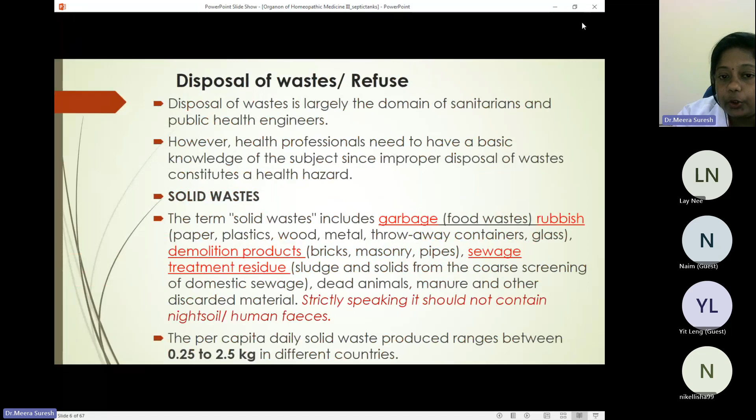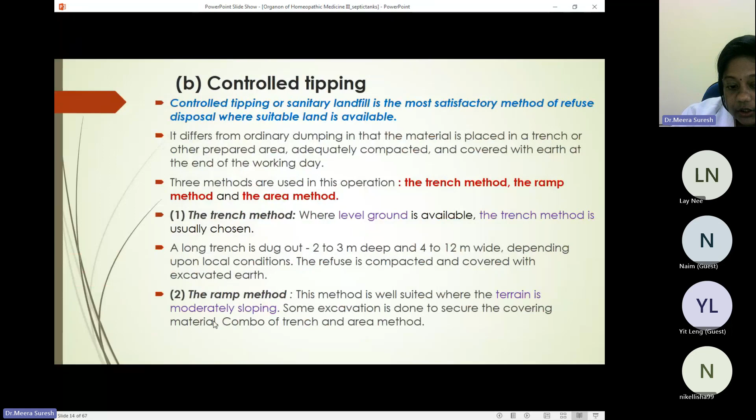So last class we were doing the conservancy, or how to do the waste disposal. So we were doing the disposal of the refuse, the different methods to be followed: dumping, which is not at all a sanitary method, and then the controlled tipping, in which we make it layer by layer. And then we saw, according to the area that is available, there could be a trench method, a ramp method, and also the area method.

But the problem with the area method is there won't be any excavated earth to cover over that dumped waste. So we have to bring the earth or the sand to cover it from somewhere else. So that is the only negative with the area method.

And the principle, be it area method, ramp or trench, or even the dumping, the principle is the same, because when we put it together or dump together and layer it and also cover it, after a few days, because of the thermal changes or the action of the bacteria, the temperature increases, and that temperature will be killing all the organisms, all the bacteria. And after a few days, like 2 to 3 weeks, it will be cooling down, and then it will be converted into an organic matter.

And we saw incineration, especially when there is no area. In Singapore, the main method is incineration. They take the waste material to an island where there is no inhabitant, and then they incinerate over there. The best method to dispose the hospital refuse or the hospital waste will be doing the incineration.

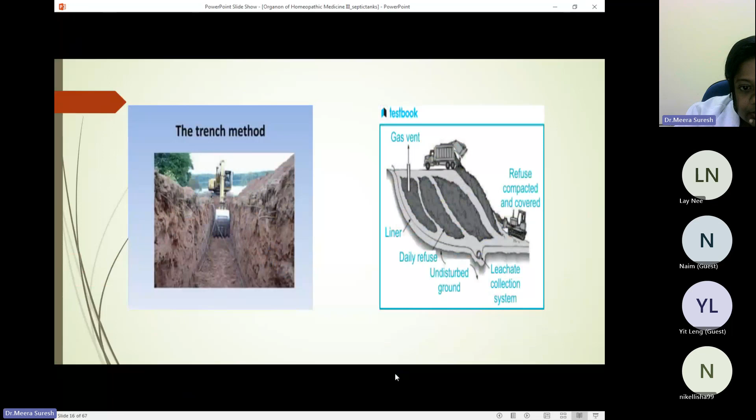So, oh, did I take this incineration? I'm not sure. Did I take it, or I stopped with incineration? Huh? I think I did only this much, isn't it? I have to do incineration, I guess.

Yes, okay. So incineration, it is burning in a high scale manner. So refuse can be disposed of hygienically by burning or incineration. It is the method of choice where suitable land is not available, when we don't have enough area. Like in Singapore, you know how your neighboring country is so dense, and there is no area available. So in that case, when there is no area available to dump it or do the controlled tipping,

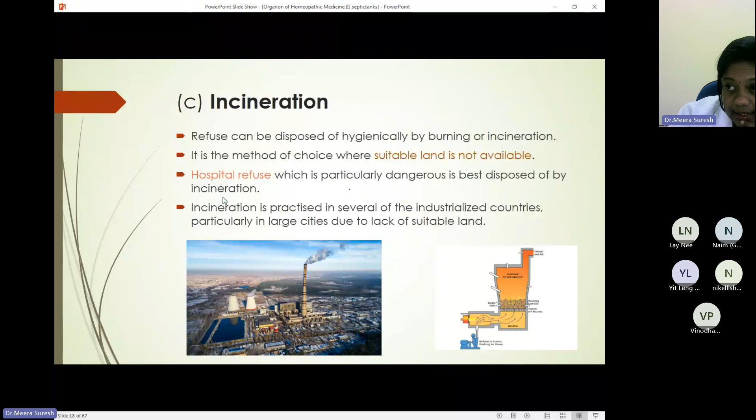the best method is incineration. Hospital refuse, which is particularly dangerous, is best disposed of by incineration, because in the hospital there may be the clothes, which will be having the blood or the pus, or any discharge from the patient, and also the used syringes. So they are easily transmitting any kind of disease. So they're particularly very dangerous. So it is better to get it disposed of by incineration. Incineration is practiced in several of the industrialized countries, particularly in large cities, due to lack of suitable land.

So I have kept a lot of videos for you to watch. I think we'll watch just one from this. The other videos, maybe you can watch it later. So we are seeing the YouTube page now. Are you all? Yeah, seeing the screen, yes.

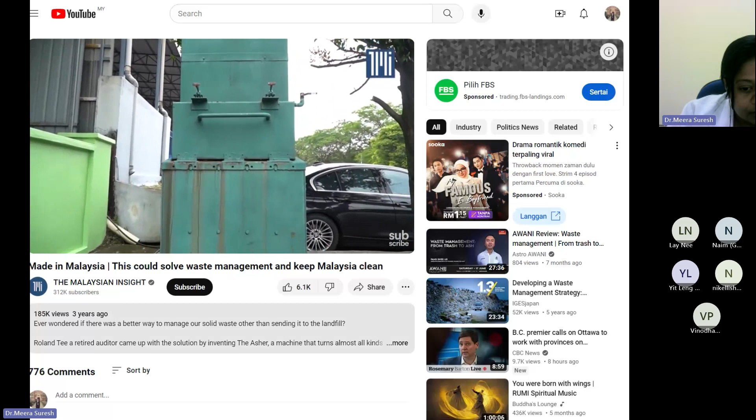The waste that we have here is just a mixture of all types of waste. You don't have to do a segregation when it comes to the Asher. Even you look at this one, it's just a power bank battery. We can just drop it in. We can just put it into the Asher. Used plastics, cans, boxes, your general municipal waste from your household. Everyday waste, easily treated. You don't have to do any sorting. You put in a power bank, you can go. You put in a spray can canister, you can just go. All right. So all this can go into the Asher easily without sorting, without any segregations.

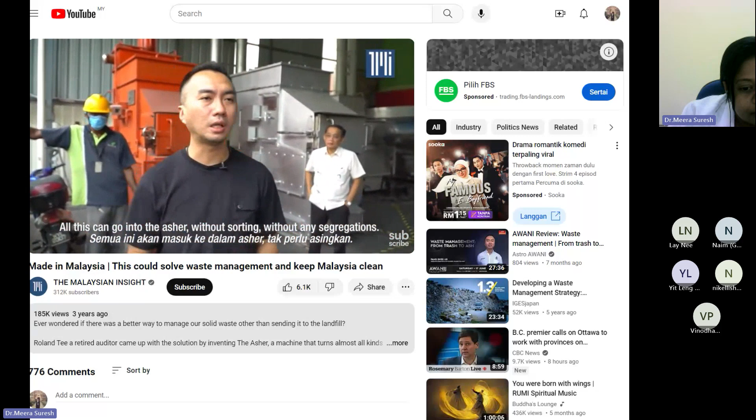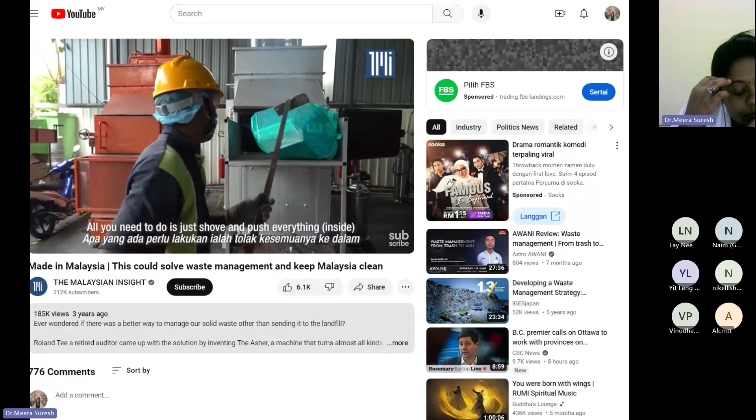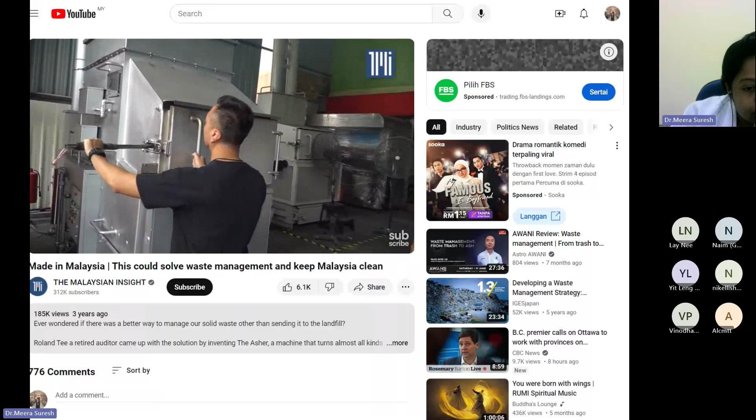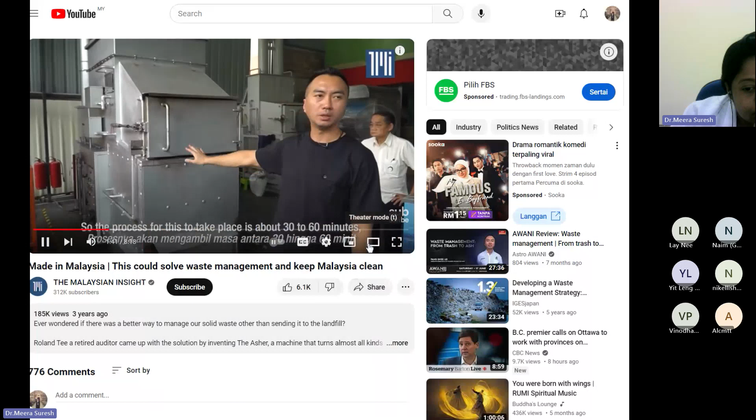And to operate the Asher is very easy. Ragu? So all you need to do is just shove everything in, just push everything. The Asher now is operating at about 400 to 500 degrees C. And as you continue to use it, it will build up to 700. Next one goes up to 1100 degrees C maximum. So once the chamber door is closed, it will be a closed loop system. There's no other emissions coming out of it. So the process for this to take place is about 30 to 60 minutes. Everything will be disintegrated into ash.

What happens in the chamber is baking and drying at ultra high temperature, right? So there's no fire, there's no combustion in this system. We are not burning. It's just heating and drying, right? So when you do not burn, there's a very different chemical reaction as compared to incinerators or WTE. So what we are availing here is a very clean, cost-efficient, and practical solution to treat waste, to dispose waste without fuel, without diesel, without gas, without any petrol. It's going to be self-generated, the heat, and will self-contain and continuously be treating the waste without external fuel energy. Just for demonstration's sake, this is untreated smoke, right? This is very bad.

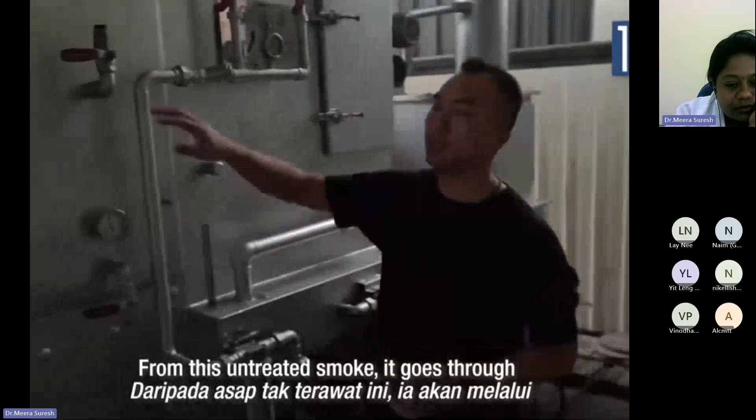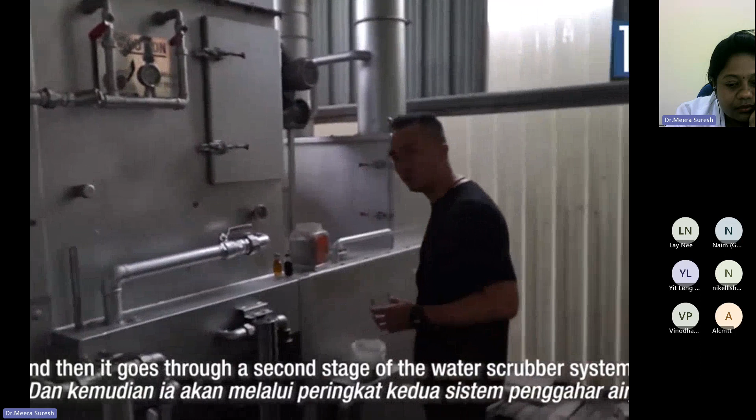So from this untreated smoke, it goes through the proprietary water scrubber system, carbon filtration system, and then it goes through a second stage of the water scrubber system and the filtration system. So after the two filtration systems, we release full compliance vapor.

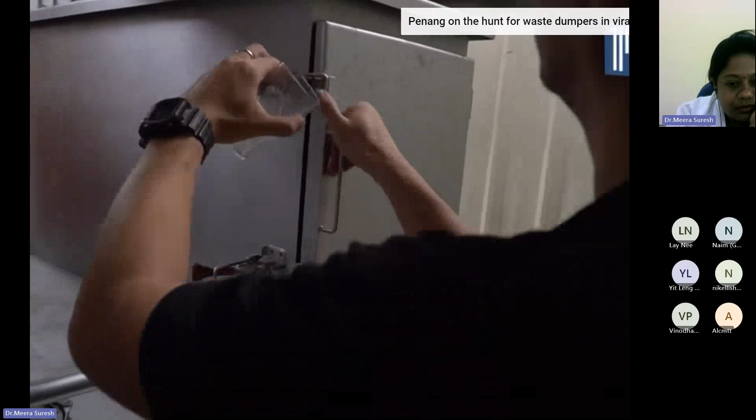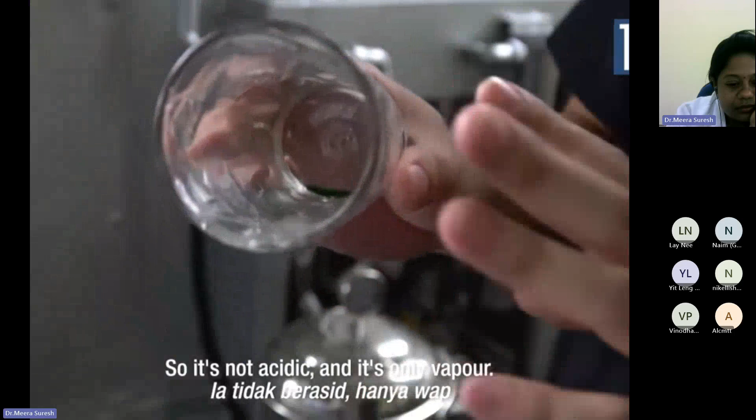So we release only vapor after all the filtration system, and the vapor is in the form of mild alkaline, a pH of 8.5. So it's not acidic and it's only vapor. The fume that comes out is 100% vapor. It's not smoke. For our 2-ton solar, it's 70% vapor, 30% smoke. And our emissions are in full compliance with the US EPA standards. Our suppression system is easily more than 99% effective against the allowable limits.

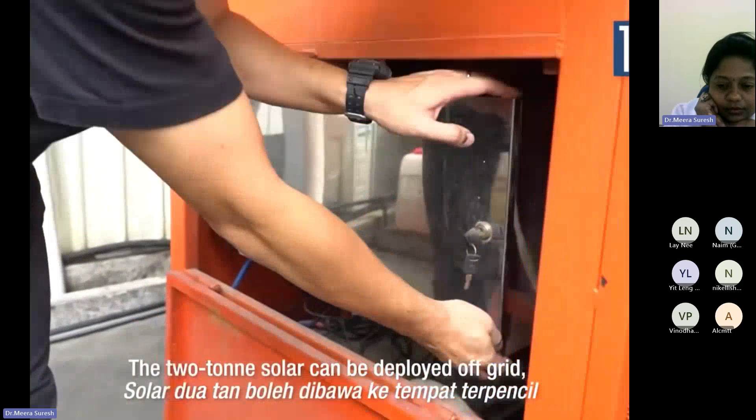And the electricity that is used by the electric unit is not for the heat treatment process. The electricity here is for the aeration system and for the water scrubber system. And the power that we consume from the Azure is, on average, not more than 4 kilowatts per hour, which is very much the same as your 1.5 horsepower aircon at home.

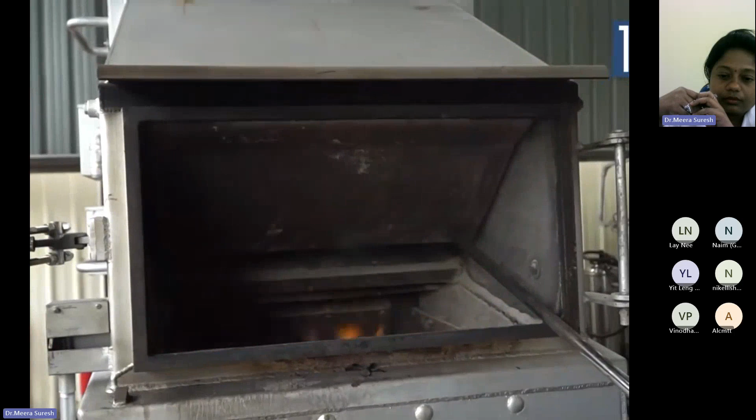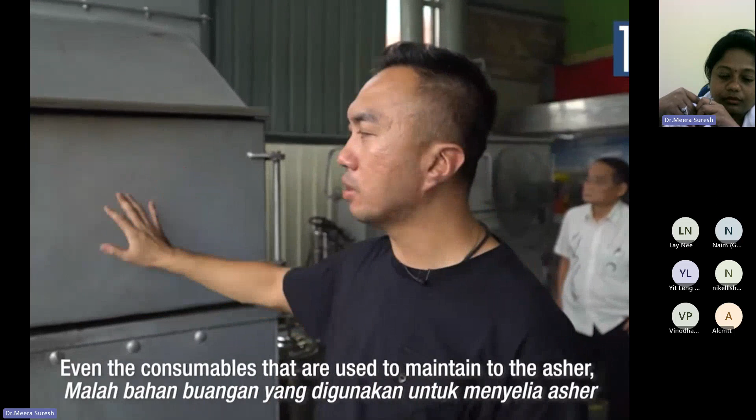What we are doing now is currently relocation of waste from one location to another location, and finally to the landfill or the incinerator. In this case, everything that comes here ends here, stops here. From the asher itself, there's no secondary discharge. There's no secondary contamination. Everything stops here. Even the consumables that are used to maintain the asher will be self-treated in the system. It will not be sent somewhere else.

And the byproduct of the asher, which is the ash down here, can be used as fertilizer, or you can use it to make sand bricks. This thing is green and environmentally friendly. Even the surrounding of the working area of this place is clean.

We have tested the environmental air quality within this working area using a system. The air quality parameters, which include CO, CO2, PM 2.5, NOx and SOx, are all in the green zone. It means that this is a place that is suitable and safe for the workers to work. There's no smell, very minimal smell. There's no wastewater around here.

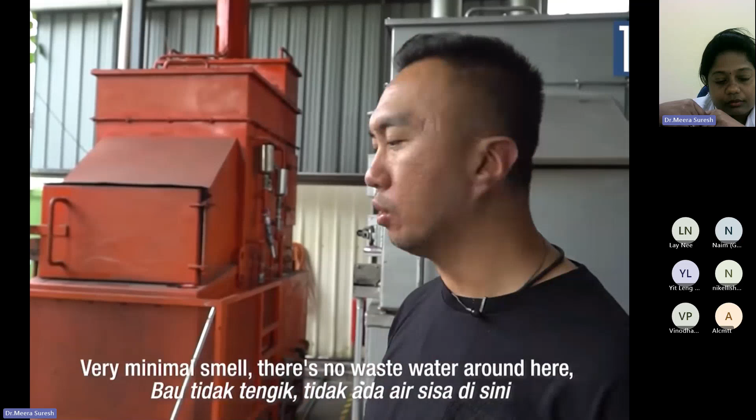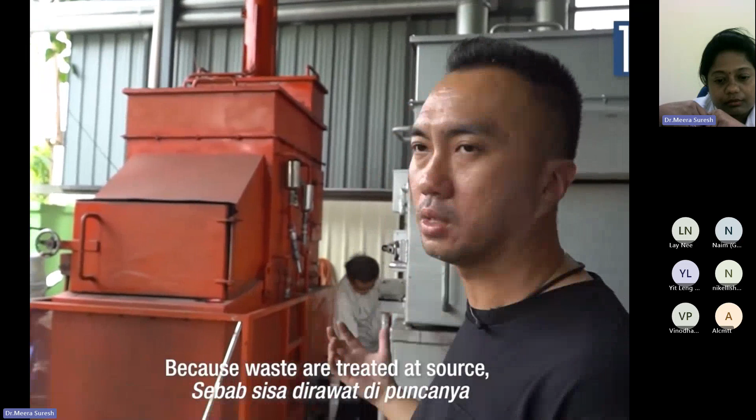There's no bacteria, rodents, flies or maggots around here, because waste is treated at source, as early as source. Whatever comes, we just put it into the asher and treat it. Imagine this being placed at condominiums, shopping malls, airports, low-cost apartments, or taman perumahan. Waste is treated at source rather than being accumulated and transferred from one location to another. In the KL scenario, it goes from the household community to the transfer station, and from the transfer station to the landfill.

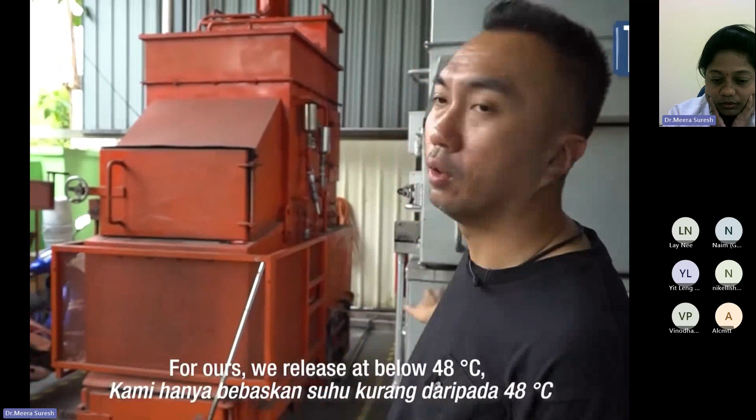In terms of capacity, this is the 2.5-ton electric smokeless. So on a daily basis, we are treating between 2.5 tons to 3 tons. A large incinerator ranges between 500 tons to 1,000 tons. In terms of emission temperature, an incinerator will release its emission at between 150 degrees C to 180 degrees C. Ours releases at below 48 degrees C. So in terms of temperature, it doesn't impact the environment.

In terms of pollutants, like I mentioned earlier, our suppression system is up to 99% efficiency. For instance, the most pressing matters will be dioxin and furan. The allowable limit for dioxin and furan based on the US EPA standards is 0.1 ng per meter cube. This asher releases 0.0014, which is about 99% lower than the allowable limit.

In terms of CO, carbon monoxide, the allowable limit based on the US EPA standards is 50 mg per meter cube. Our system releases 0.2 mg per meter cube. That's about 95% lower than the allowable limit. So we have tested; this is not a concept, this is not a trial. We are in 13 countries, and we have supplied more than 60 units.

Yeah, so coming back, I hope you enjoyed the video. How was it? Yeah, good info, because I never think of that.

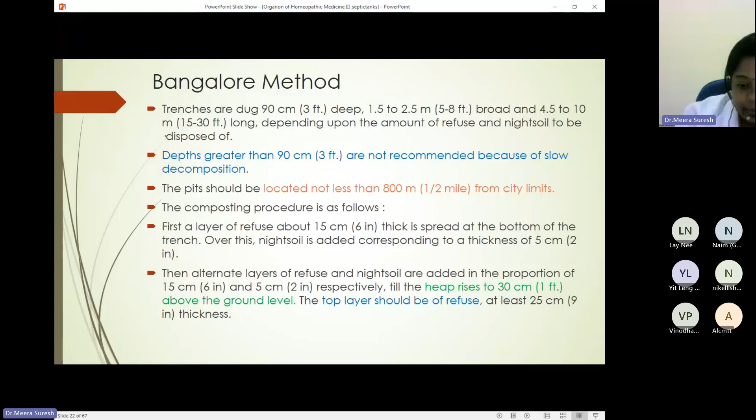Then alternate the layers. So one layer will be refuse, then another layer of night soil. They keep it layer by layer till the heap rises to 30 centimeter or 1 feet above the ground level. And the top layer should always be refuse, not the night soil. So the first underneath layer is refuse, and the topmost layer should also be refuse. And the refuse has a thicker layer compared to the night soil. So it is kept in an alternate way, and when it reaches 30 centimeter above the ground level, then close it off.

It is covered with the excavated earth. If properly laid, a man's leg will not sink when walking over the compost mass. And the same principle is happening. Within 7 days, the bacterial action takes place, which produces heat over 60 degrees Celsius, and that will be converted into the compost mass. This heat will persist for 2 to 3 weeks. It then decomposes the refuse and the night soil, and all the pathogenic organisms will be destroyed, completely converting that waste, the refuse and the night soil, into a high manure compost.

At the end of 4 to 6 months, decomposition is complete, and the resulting manure will be an odorless, innocuous material of high manurial value ready for application to the land. However, the Environmental Hygiene Committee did not recommend composting by municipalities with a population of over 100,000. Bigger municipalities should install underground sewers to transport human excreta. So this committee in 1949 itself told it is possible for municipalities with less than 100,000 population, and bigger populations should have underground sewers to dispose of human excreta.

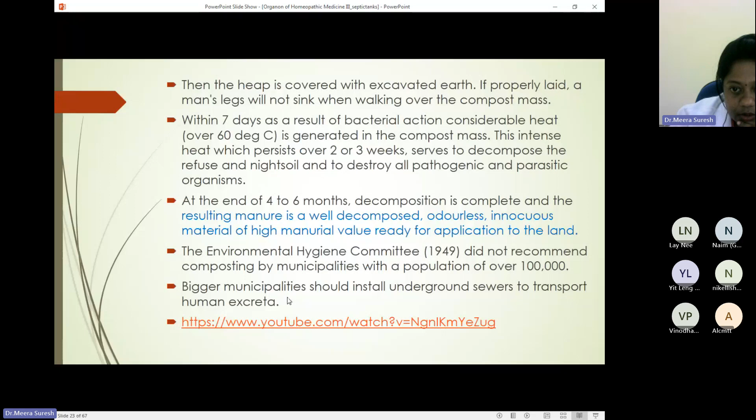Okay, this is a video that is showing the process of composting, the methods, the Bangalore method, and also the mechanical. Maybe we watch mechanical. Because in this anaerobic method, the Bangalore method, when the area is available, we are doing it manually. But in mechanical, we take this refuse and the night soil, and it is treated to produce manure in some factories.

So ASHO was not exactly composting, or maybe it can be considered composting, but he didn't say anything about the night soil. He just told anything can go into it, even the power bank. I'm not sure, but in the case of mechanical composting, the compost is literally manufactured on a large scale by processing raw materials and turning out a finished product. The refuse is first cleared of salvageable materials such as rags, bones, metal, glass, and items which are likely to interfere with the grinding operation.

So definitely not according to the video that we saw. So they first remove all the things which are going to interfere with the grinding, and then they're going to grind it or pulverize to reduce the size of the article to less than 2 inches. The pulverized refuse is then mixed with sewage. The sewage means the sludge that is coming from the public sewerage, and then it is incubated in a rotating machine. It is put in a rotating machine and then incubated.

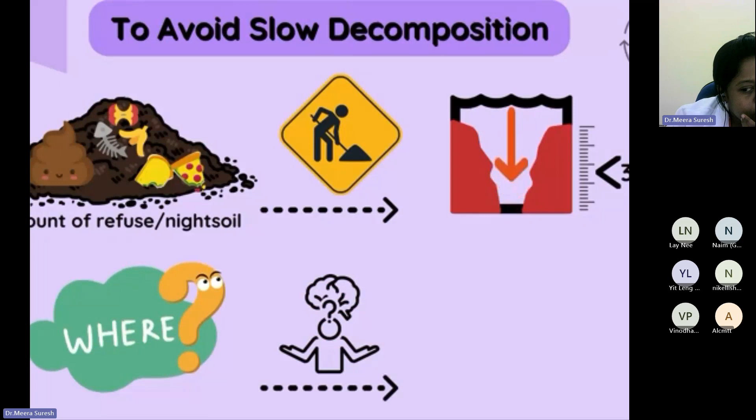To begin with, this is an anaerobic procedure developed by the ICAR, or the Indian Council of Agricultural Research at the Indian Institute of Science, situated in Bangalore, and hence the name. So, what exactly is done in Bangalore method? In the Bangalore method, we first dig pits or trenches depending upon the amount of refuse and night soil to be disposed of. To avoid slow decomposition, avoid trenches having a depth of greater than 3 feet. You might be wondering, can these pits be dug anywhere? Well, this technique specifies that the trenches need to be located at least 800 meters away from the city limits.

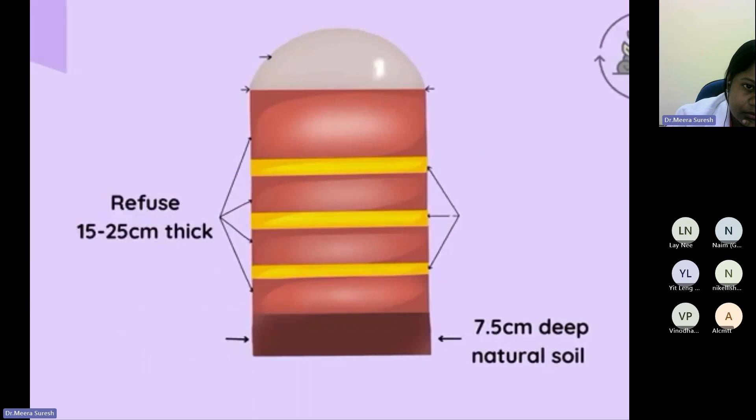So, what next after digging the pits? As you can see here, first, a layer of refuse is spread at the bottom, over which a layer of night soil is added. Night soil is a term used to refer to human excrement and other bodily waste that is collected from households and used as a fertilizer for crops. The term has its roots in a time where human waste was collected at night and transported to fields for use as fertilizer during the day. Following this, alternate layers of refuse and night soil are added till the heap rises 1 foot above the ground level. Always remember, the top layer of this heap should be of refuse, which is at least 9 inches in thickness. This heap is then covered with excavated earth and then compacted to prevent fly breeding, entry of rainwater into the pit, and for conservation of the released energy.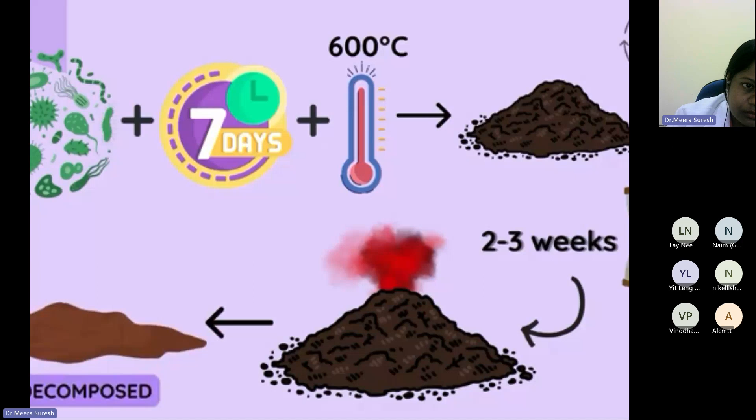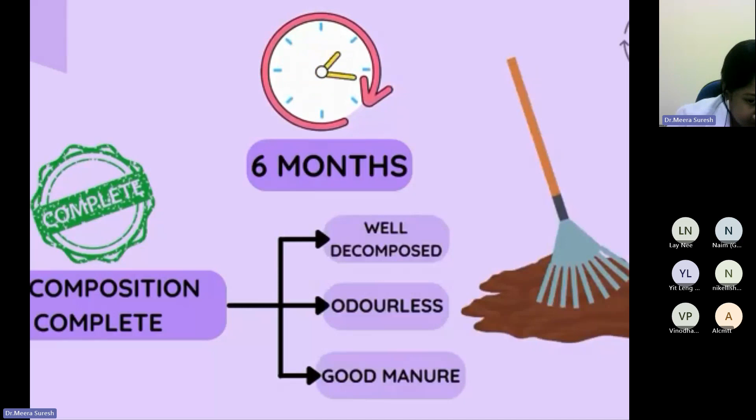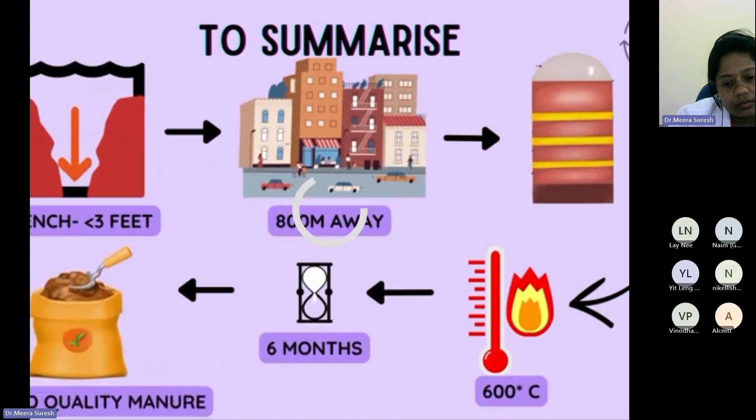Due to the bacterial action, within 7 days, considerable heat of over 600 degrees Celsius is generated in the compost mass. This intense heat will persist for over 2 to 3 weeks, thus leading to the decomposition of the waste. This is the reason why this procedure, alongside being known as the Bangalore method, is also known as a hot fermentation process. By the end of 6 months, the decomposition is complete, and the resulting material is a well-decomposed, odorless material with good manurial value. To summarize, this procedure is carried out by digging trenches at least 800 meters away from the city bounds, and alternate layers of refuse and night soil are filled in, with the top layer always being the refuse. The heat of over 600 degrees gets generated within a week, and by the end of 6 months, we have our decomposed material ready, which can also be used as good quality manure. This was all for this video. Hope you have a better understanding of

Sorry. When I was sharing, I did the Bangalore method. Then is the mechanical thing. I think you may watch it later. We'll go to the next one because there is another video also which I want you to see. So mechanical composting, I made a mistake. Okay, I shared this one. Actually, it should have been this one. So you can watch it later.

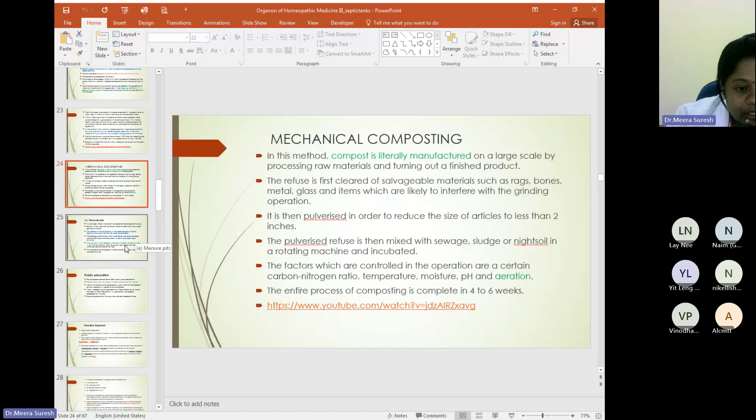We go to the last method of refuse disposal, that is manure pits.

I think I have not shared. Are you seeing the PPT now?

Okay, manure pits. So the last method will be the manure pits. Manure pits are used in a rural area, in a single individual house, where they don't have any other methods of composting. It is composting, but on a small scale. In front of each house, we can do it. So they are going to make a pit, not in a very wide, large area.

In rural areas, there is no system for collection and disposal of refuse. It is thrown around the house indiscriminately, resulting in gross soil pollution. So the problem of refuse disposal in rural areas can be solved by digging manure pits by the individual householders. The garbage, cattle dung, straw and leaves should be dumped into the manure pits and covered with earth after each day's dumping.

So in each individual house in a rural area where they have space, they can go for this method. After putting in every day the refuse that has been produced that day, cover it with some earth, then reuse it the next day. Two such pits will be needed. When one is closed, the other should be in use. Once one pit is getting filled up, use the second one.

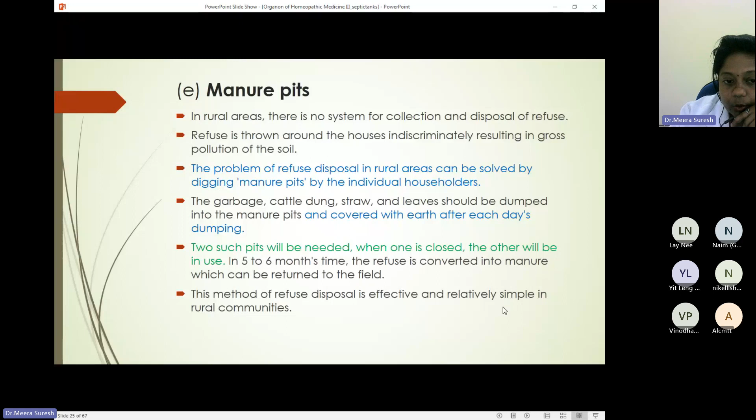Refuse disposal cannot be solved without public education, because people have very little interest in cleanliness outside their homes. Once the waste bin or dustbin has been dumped in the common area, we are not bothered about what is happening outside. So public education is very much required. Many municipalities and corporations usually go for the cheapest solution, especially in regard to refuse disposal.

In one of the earlier PowerPoints on the water system, there was a sentence, I don't know whether you remember, that even in Malaysia, the government was ready to give more money for the supply of safe water, and gave a very small amount for the sewerage system. So the public sewerage system didn't come up to the mark, because the amount they were ready to spend on it was very little. The main priority was supply of safe water.

That was not just Malaysia; it is a generalized thing that people give more importance to water supply, because it is one of the most indispensable things we need for the existence of life. When a community has to set priorities between safe water and waste disposal, both are equally important. But if resources are very limited and we are asked to prioritize, a little more priority will go to safe and wholesome water.

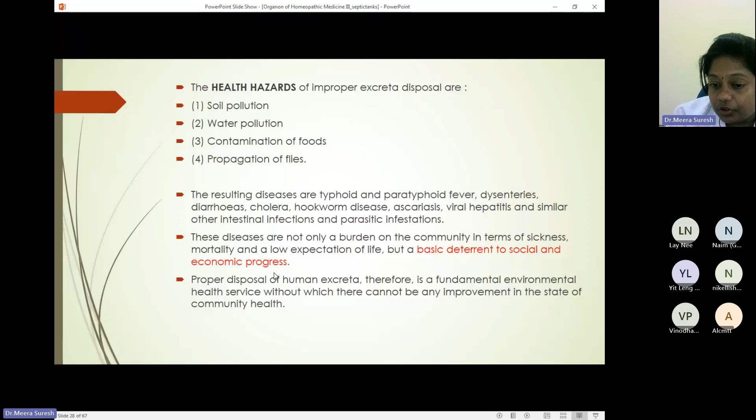If it is a developed country, they will have a better mode of waste disposal, and their communicable diseases are less. The mortality and morbidity from these communicable diseases are very low. They are socio-economically in a higher position. But when we come to the poor countries where the socio-economic level is already low, they don't have much money or resources to spend on waste disposal. That is going to result in communicable diseases, which will affect the population, increasing the morbidity and mortality. Then they won't be healthy enough to work or be productive, resulting in further lowering of the socioeconomic standard of that country. So it's like a vicious cycle. Proper disposal of human excreta, therefore, is a fundamental environmental health service.

Now, methods of excreta disposal, how we need to dispose the excreta. There can be unsewered areas or sewered areas. Unsewered is where there is no public sewerage system. There are three types there. The first one is service type latrines, also called conservancy type. The second one is non-service type or sanitary latrines. Under that, we have the borehole latrine, dug well or pit latrine, the water seal type of latrines, PRAI or RCA type or Sulabh Shauchalaya. This is mainly the type still in use in India. Then the principle of septic tank.

Then latrines suitable for camps and temporary use. We can use a shallow trench latrine or deep trench latrine. It depends upon the number of people attending the camp and how many days the camp will be going on. If it is a 1 or 2 day camp and only 10, 15 or 20 people are there, we can go for a shallow trench. But if the number is more or the days are more, we go for a deep trench latrine. The principle is simply to dig a trench, shallow or deep, depending on the number of people and the duration. Then pit latrines or borehole latrines are also suitable for camps and temporary use.

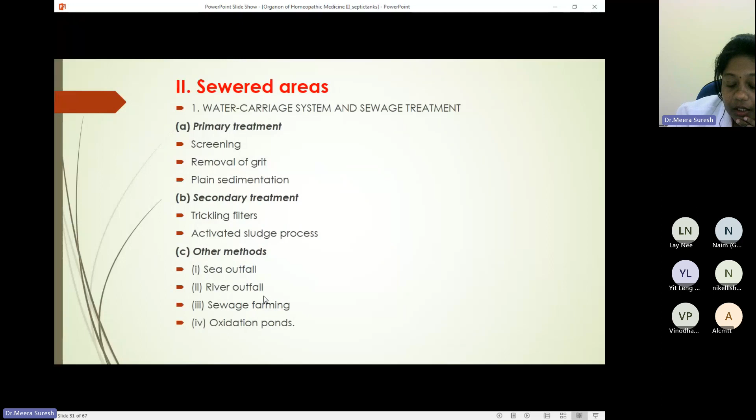In the case of sewered areas, there will be a public water carriage system and then its treatment. They will have a primary treatment, a secondary treatment, and after this treatment, what you do with that, the other methods to be done in sewered areas.

So in the case of a non-sewered area, in small individual houses, we can go for the method of the septic tank. Then the connection is not made with the public sewage system. But in Malaysia, in a bigger flat or a residential area of Kuala Lumpur, where people don't have individual houses or the facility of a septic tank, there should be some mode of container, and this will be taken to some factory where it is treated and then made into compost.

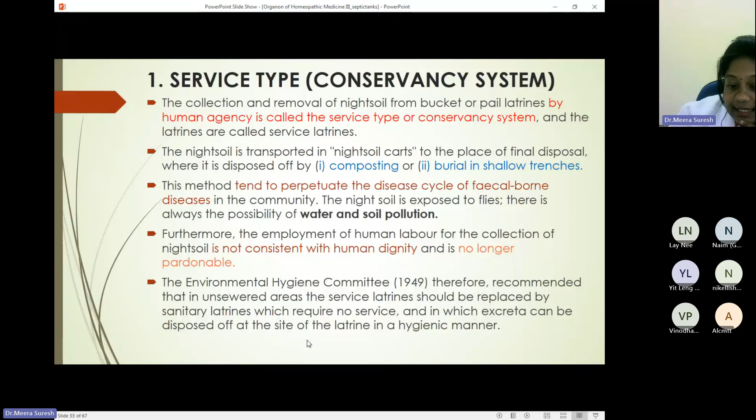So the sanitary latrine should be replacing the service latrines. It was decided in 1949 itself. And the sanitary latrine requires no service. No service means no direct human service, and in it excreta can be disposed of at the site of the latrine in a hygienic manner.

And this book, I have not read it, but it talks about generations, like from the father, his son is taking up that job, and then his son. So it tells the story of 2 or 3 generations, how this job was given. Only that particular category of people used to do this work, and they were considered untouchables. And Kerala is famous for untouchability in earlier times. So if anyone is interested in reading, you will get the English version also. But it's a tragic story. It's a tragic story.

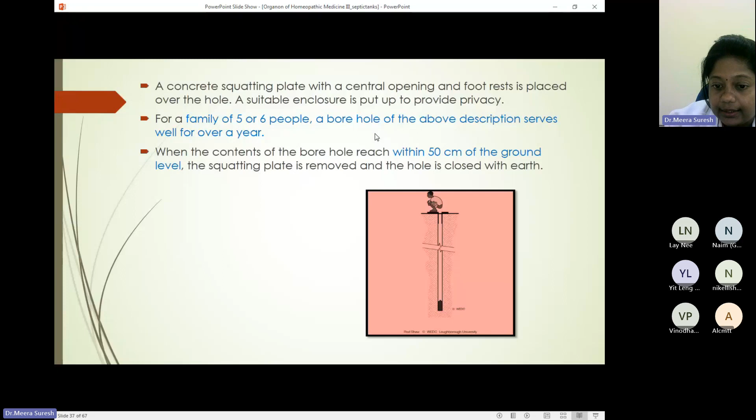So a concrete squatting plate with a central opening and a foot rest is placed over the hole. A suitable enclosure is put up to provide privacy. For a family of 5 or 6 people, a borehole of the above description serves well for over a year. When the contents of the borehole reach within 50 centimeters of the ground level, the squatting plate is removed and the hole is closed and another one is dug. So that is the borehole latrine.

The dugwell latrine or the pit latrine. So this was introduced in India in Singur, West Bengal, in 1949 to 1950, around that time. It is an improvement over the borehole latrine. A circular pit of particular measurement is dug into the ground for the reception of the night soil. The advantage is we don't need a special equipment here like the auger that is required for digging the borehole latrine. Its size will be larger, so it has got a longer life because of that larger capacity.

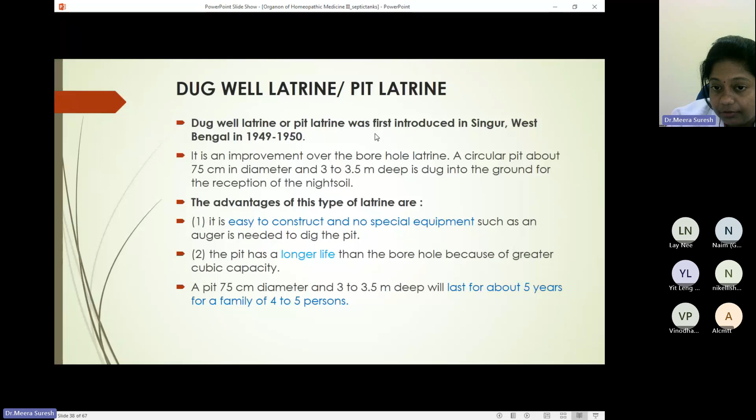So this latrine is an improved pit latrine designed to minimize odor and flies. A vent pipe is covered with a gauze mesh, fly proof, so the flies won't get inside. There will be some fly proof mesh over there, so they don't have accessibility, and the odor will be emanating out. So a better variety of the pit latrine. But still, this is a non-service type, and the problem of odor is going to be a big problem.

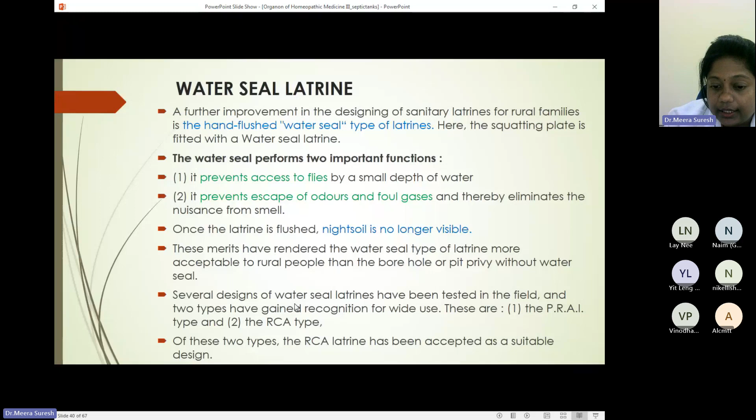Several designs of water seal latrines have been there. One is the PRAI type and the RCA type, and RCA is more accepted as a suitable design. So in the water seal latrine, there is a squatting plate, and then the stool will be collected where there is actually a water seal pan, and then we flush it, it goes to the collecting or storage area, the septic tank or anything.

Sometimes this storage may be directly underneath this toilet system, or sometimes it may be kept a little bit away, where there will be a tube or a pipe that is sloping towards the pit. So the water seal latrine, otherwise called pour flush latrine, may be constructed directly above a pit. Either this pit may be directly underneath, or it may be offset, whereby the waste travels through a discharge pipe to that pit or the septic tank.

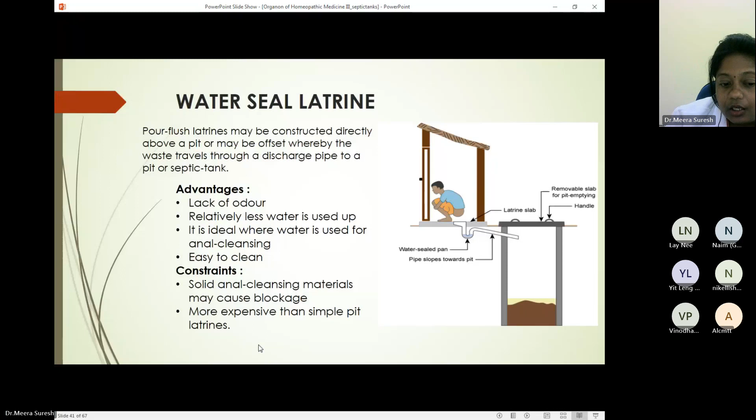Advantages: there won't be any odor. Relatively less water is used up. It is ideal where water is used for anal cleansing and also easy to clean. Constraints: if they are going to use solid anal cleansing materials, it can cause blockage. More expensive than simple pit latrines. Then the best design that we told, the RCA latrine.

In general, it may be stated that latrines of any kind should not be located within 15 meters or 50 feet from a source of water supply. When we were learning about the sanitary well, we have studied this. Whatever it may be, the toilet or the septic tank, it should be away. It shouldn't be close to that water source. It should be minimum 15 meters or 50 feet away from that water, and it should be at a lower elevation to prevent the possibility of bacterial contamination.

The RCA latrine should be provided with a squatting plate, a pan to receive the night soil, a trap, the water seal trap, which holds the water and provides the necessary water seal. There should be a connecting pipe. When the pit is dug away from the squatting plate, then there should be a pipe to connect, and that pipe will be discharging the feces to that pit.

The dug well or the pit is usually 75 centimeters in diameter and 3 to 3.5 meters deep and also covered. Then a superstructure will be there to provide the necessary privacy to the person using it. So this will be the RCA latrine with the water seal, the connecting pipe, and the tank or the dug well where the feces will be collected.

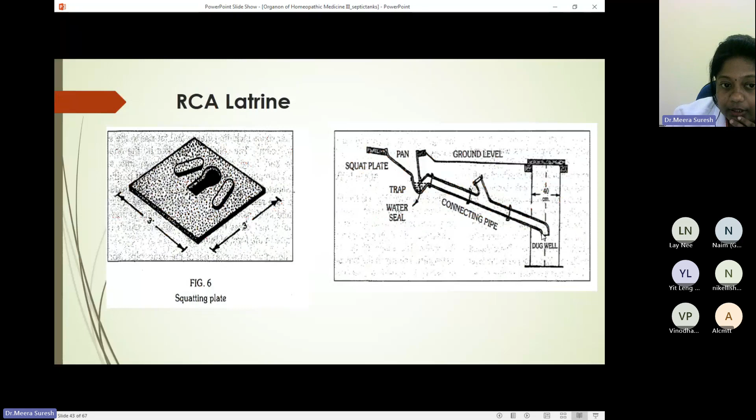Now, after this is collected, if this is a septic tank, then what is going to happen to the feces that is being collected in the septic tank? So we need to know what is happening inside a septic tank. A septic tank is usually utilized for a household, like in a small area. A single individual house of 4 or 5 people could have a septic tank, or in small areas like a village, a common bathroom or a pipe connecting to a septic tank for 3 or 4 households.

So when we are using a septic tank, there shouldn't be a public sewage system, where there is an individual home and there is space to do that, and the areas where there is no public sewage system. So a septic tank is a watertight masonry tank into which household sewage is admitted for treatment. Household sewage means it is not just the night soil that we flush; even the water from bathing, washing clothes, washing the dishes. Whatever wastewater and night soil, everything will be collected into the septic tank.

It is difficult to manage for larger populations; as I told, only for a small group of people, like individual dwellings or small groups of houses and institutions. They should have adequate water supply, but they should not have access to a public sewage system. Then a septic tank is ideal. The efficiency of a septic tank system is inferior to that of public sewage, but it is much cheaper, quicker, and easier to provide and maintain than sewage works. A septic tank consists of an underground concrete tank, usually double chambered.

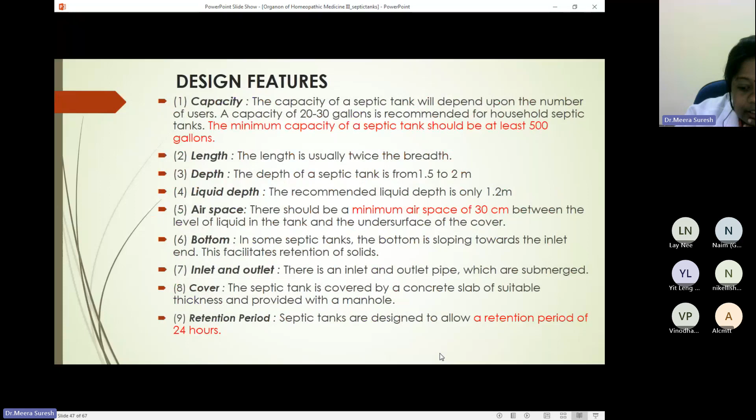what did I say? The septic tank should have actually two chambers. So this is like a two chamber. So here itself the aerobic will happen. In case if it is two chamber, then the outlet pipe is not allowing the effluent to go to the soil. The treatment is taking place over here.

But in this one, there is only a single chamber. So in this single chamber, the outlet pipe takes the water to the subsoil level where the aerobic bacteria will act upon and do the second part of the digestion.

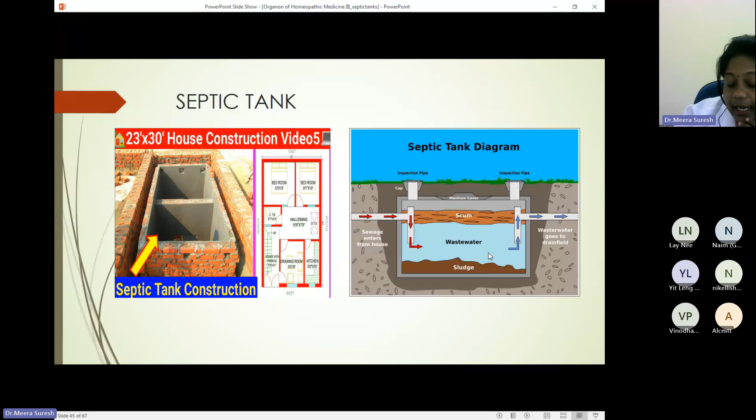So usually if we consider that the septic tank is single chambered, the first step of purification, that is the anaerobic one, is happening inside the septic tank. And the second process is the aerobic one, which is happening outside the septic tank, underneath the soil. Only that much you have to remember.

So to sum up, two stages are involved in the purification of sewage. The first stage is anaerobic digestion taking place inside the septic tank proper. And the second stage is aerobic oxidation that is taking place in the subsoil. Now about the operation and maintenance, it is very simple.

To commission a septic tank, it has to be first filled with water and then seeded with a bucket full of sludge from another tank. We have to bring it from another tank, as I told, because that will be having that anaerobic bacteria. The use of soap water and disinfectants such as phenol should be avoided as they are injurious to the bacterial flora in the septic tank. Not directly using the soap water and disinfectant.

Undue accumulation of the sludge reduces the capacity of the septic tank. So every year, or depending upon the usage, the number of people and also the capacity of the septic tank, we should do the process of desludging, or we should bail out the contents in the septic tank once in a year. The bailed out sludge is then disposed of by trenching. So usually this process takes place at night, okay?

At night, there are people in Kerala and also in India, wherever the septic tank is being used, to do this work, a modern type, but they are not coming into contact with the night soil in any way. They will be coming with a particular van at midnight, and there will be a larger size pipe, something that can pump and take the contents by pressure, and they will be laying it from the van to the septic tank.

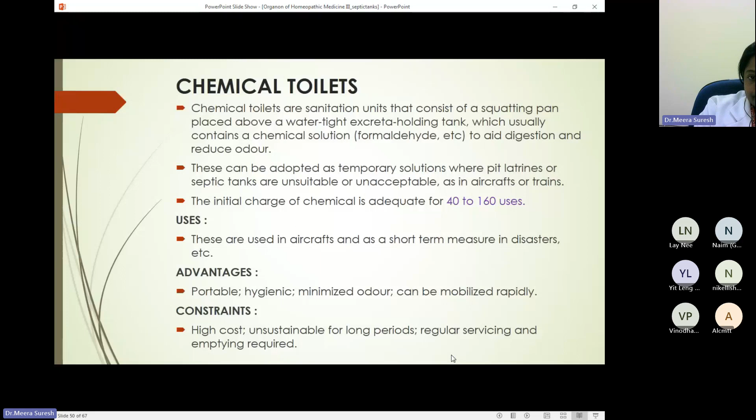Now, the disposal of sewage. In a bigger city where there is a public sewage system, what is happening with the sewage? In a single household, we learned how it is being desludged and then removed. But what happens in a city like Kuala Lumpur? So what is sewage? We start from that. Sewage is wastewater from a community containing solid and liquid excreta.

We have already learned in one of the earlier slides the difference between sewage and sullage, and that is actually an MCQ question. If it is the wastewater plus night soil, it is called sewage. And if it is only the domestic usage water and the night soil or fecal matter is not there, then it is called sullage, which is the wastewater from kitchen and bathroom.

The amount of sewage that flows into the sewers depends upon the habit of the people. If people use more water, there will obviously be more sewage. Then time of the day. Usually in the morning people will be utilizing the bathrooms and toilets more, so the amount of sewage will be higher in the morning, towards afternoon the flow lessens, and again there is a slight increase in the evening or night. The average amount of sewage which flows through the sewerage system in 24 hours is called the dry weather flow. This could be asked as an MCQ.

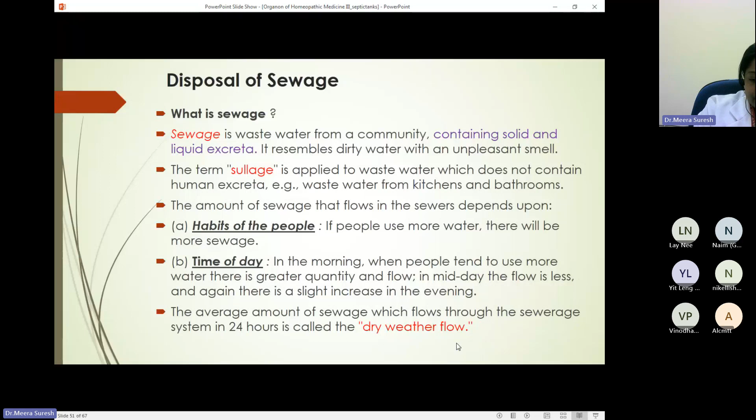We go to the public sewerage system or the water carriage system. It implies collecting and transporting human excreta and wastewater from residential, commercial, and industrial areas by a network of underground pipes called sewers to the place of ultimate disposal. It is the method of choice for collecting and transporting sewage from cities and towns where population density is high.

Laying down such a system is very capital intensive because it is going to cost a lot. It amounts to digging up lanes and bylanes. Skilled manpower is required. Piped water supply is mandatory. Ongoing maintenance is required. But this is the ideal system of sewage disposal in cities which are larger or with high population density. There will be underground pipes carrying the sewage, and the sludge after the treatment will be used for composting or

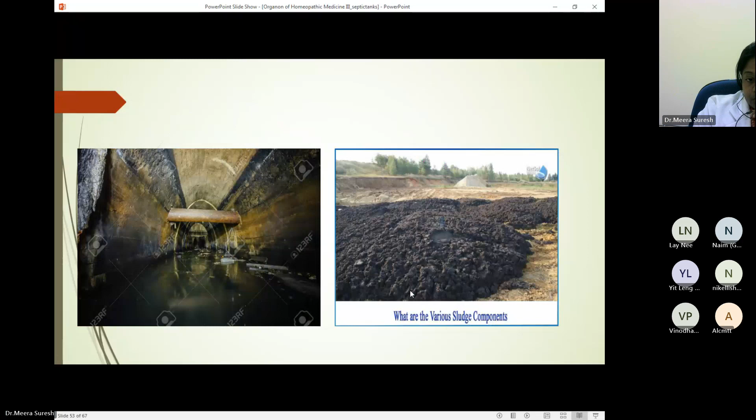controlled tipping. The composition of sewage is mostly water, 99.9% water. The solids will be barely 0.1%, partly organic and partly inorganic. So why do we do sewage purification? If you put the sewage directly into the sea or the river, it is going to cause water pollution and that will result in many diseases.

But another important thing: last class we learned about the biochemical oxygen demand. What we learned is when we put this waste in the river water, the bacteria there utilize the oxygen and break down the waste materials. So if the waste material is not treated properly, or we send the sewage without any treatment directly to the water, the bacteria inside the water will break it down anyway. You don't have to worry. They will break it down.

If it is not plastic, the organic matter, they are going to break it down, but they are going to utilize more oxygen. And if they utilize more oxygen, there won't be oxygen for the flora and fauna in the water, and that is going to kill them. It can also result in water pollution. So in the longer term, we can't do this. The main purpose is to make this sewage into a stable content so that the bacteria don't have to utilize much oxygen for its further decomposition.

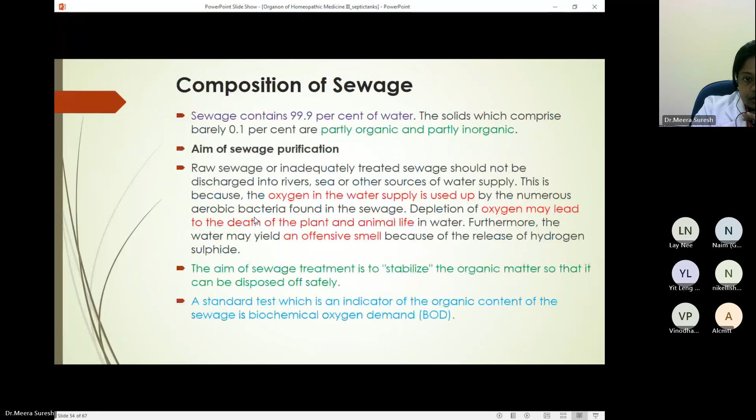So the components of a public sewerage start with the household. If you remember the picture that we had already, this one, in the sewerage area, we are starting with the infrastructure used in the individual household. From there itself, the components are starting.

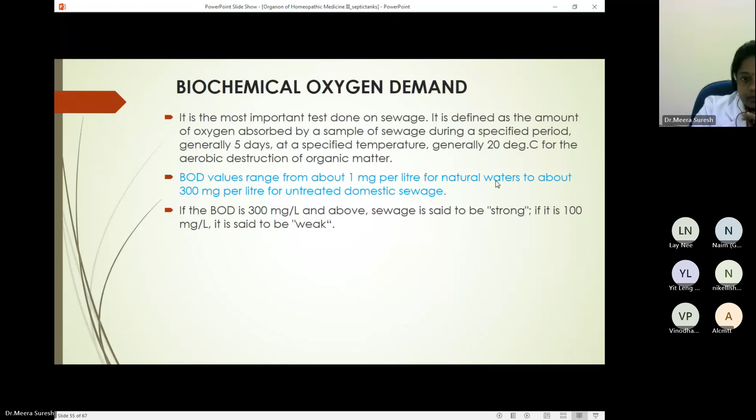It starts with the household sanitary fittings, which include the water closet, urinal, wash basin, bathtubs, etc. There will be soil pipes, which carry excreta from the water closet to the house drain. There will be the house drain, which is underground, either iron or stoneware pipe, carrying from the household sanitary fittings to the street sewers. Then we have the public sewer, carrying sewage from domestic, industrial, and commercial areas to the place of final disposal. And finally, some sewer appurtenances, which include manhole and trap.

Manholes are the places where a man can get into the sewage system for repairing or cleaning. Manholes are usually placed wherever there is a change in direction of sewers, at the junction of two or more sewers, and at a distance of 100 meters in the long straight run of the sewers. So manholes are usually created at three places: whenever there is a direction change of the sewer, at a junction where two or three sewers come together, and in a long straight run, at every 100 meters. And the main purpose is to do repairing, cleaning, etc.

Workers entering manholes are at a risk of gas poisoning and asphyxiation, so due precautions should be taken while entering into them. Then there will be another appurtenance, that is the trap. And the trap is actually to prevent the entry of foul gases inside the house, and also to remove sand, grit, grease, etc. from sewage.

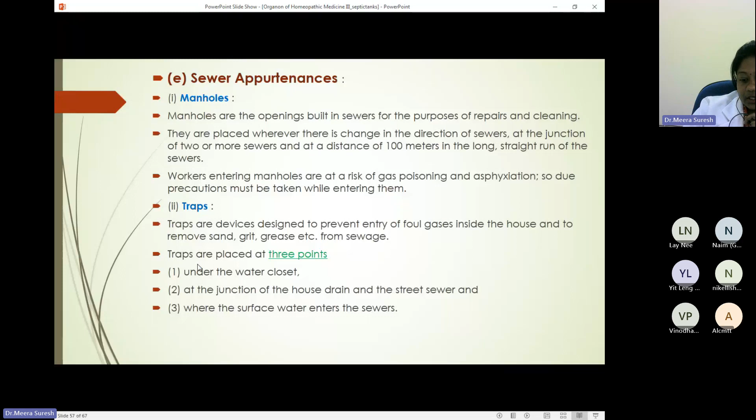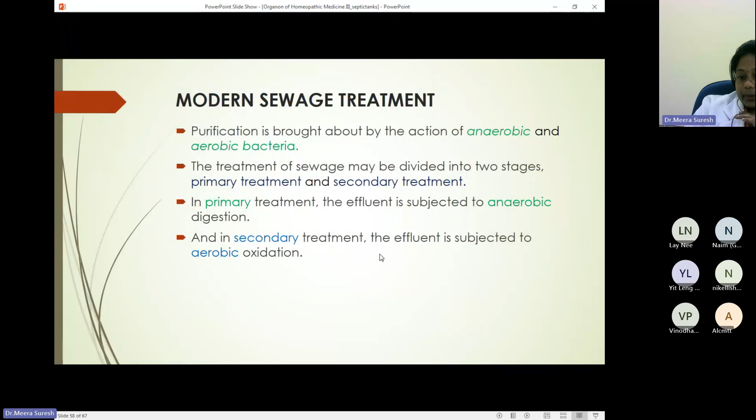Then after it reaches the sewage area, the treatment. Here also the purification is brought by the action of anaerobic and aerobic bacteria, like what we saw in the septic tank. That's the same thing happening over here. So this is divided into two stages, primary treatment and secondary treatment. In primary treatment, like in the septic tank, the effluent is subjected to anaerobic digestion, and in secondary treatment, it is subjected to aerobic oxidation.

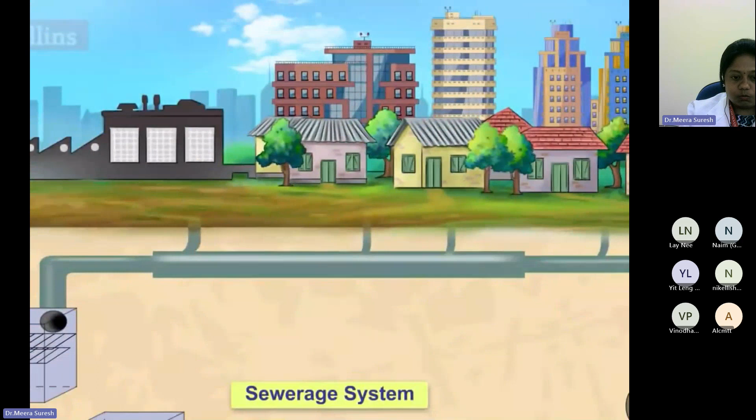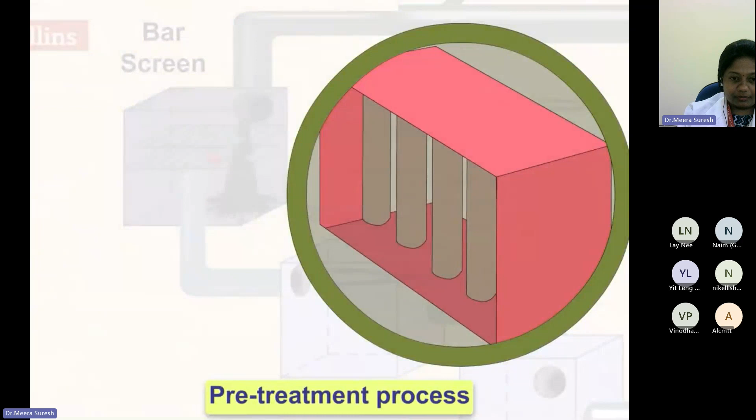Cities and towns have sewerage systems in place to carry the wastewater from our homes, hotels, factories, and other establishments to a sewerage treatment plant where the wastewater is treated. It is then deemed safe to release into other water sources. The treatment of wastewater goes through different stages. Wastewater is treated to remove the physical, chemical, and biological contaminants present in it through various processes. The pre-treatment process involves the sewage being sent through grids or vertical bars that can remove large solid substances like metal cans, paper, and plastic materials.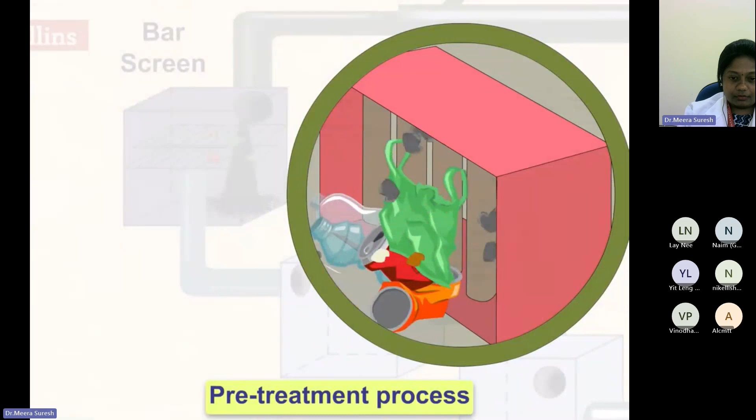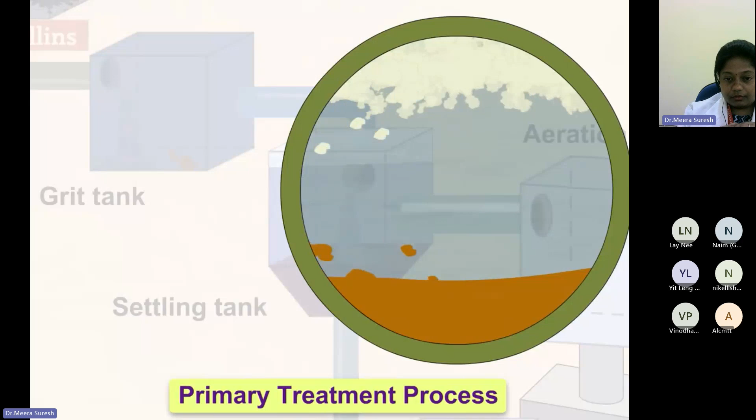In primary treatment process, the sewage flows through the grit chamber very slowly, so that the sand, pebbles, and soil settle down at the bottom. The sewage flows into the settling tank or sedimentation tank, where the solid wastes like feces are allowed to settle down. Wastes such as soaps, oils, and grease rise to the top of the wastewater. The waste material that settles down at the bottom is called the sludge, and the floatable material is called the scum. Scum is then removed using a skimmer, and sludge is removed with a scraper every few days. The water that is left out is called the clarified water.

In the secondary treatment process, biological or organic wastes are removed. It is a biological process. This is done by transferring the clarified water into an aeration tank, where air blowers bubble air, which helps the aerobic bacteria to grow and feed on the organic contaminants such as food waste, feces, and other organisms.

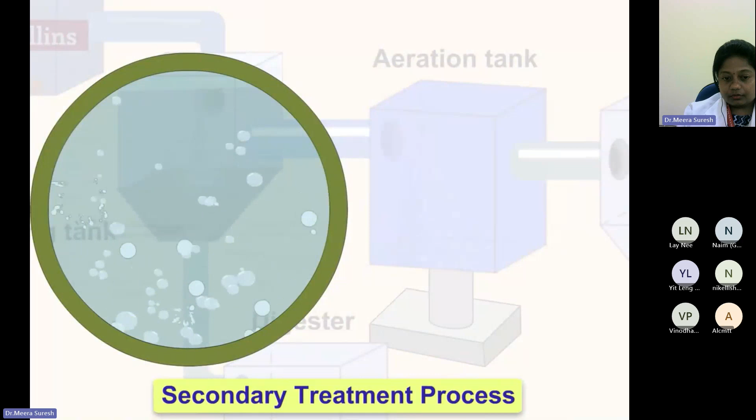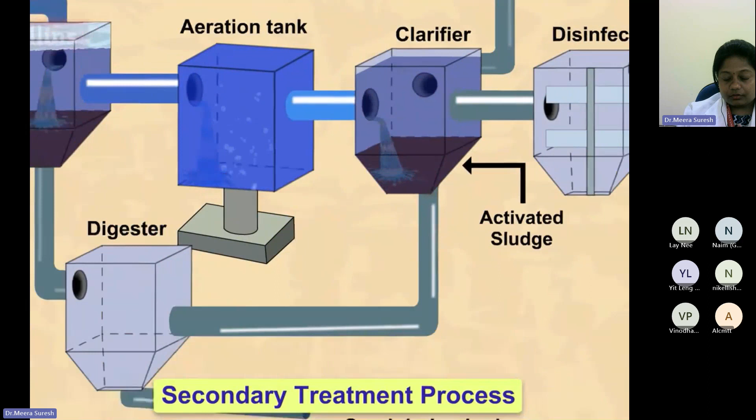The mixture then flows from the aeration tank into the clarifier, where activated sludge settles out by gravity. The activated sludge so produced, along with the sludge produced in the primary process, is transferred to the digester, where it is decomposed by anaerobic bacteria. Biogas is produced in this process, which can be used as fuel or can be used to produce electricity.

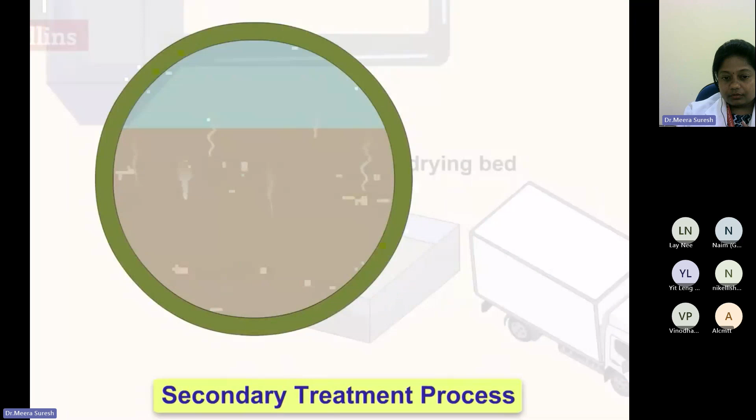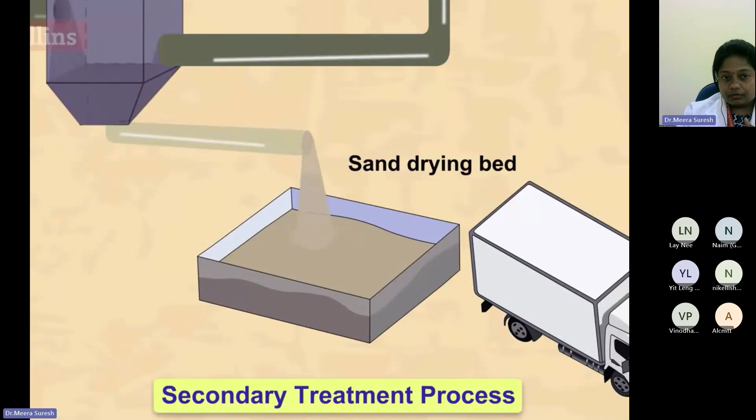The activated sludge is then left in the sand drying beds. Some quantity of water in the activated sludge evaporates and the remaining quantity drains through the sand beds. This leaves behind the remaining dried sludge, which can be used for making fertilizers or compost.

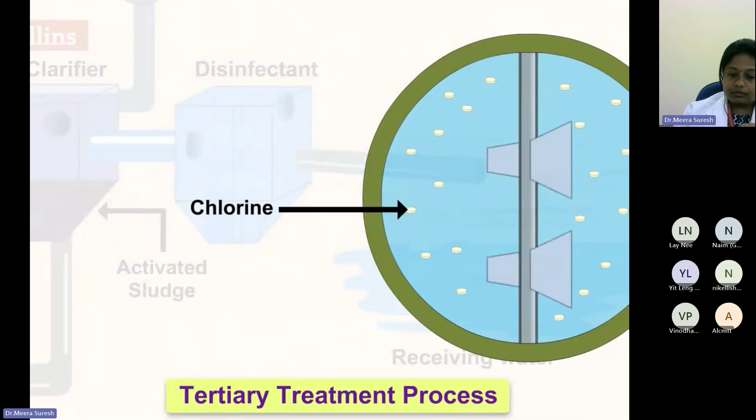In the tertiary treatment process, the leftover wastewater is treated with chlorine to remove the phosphorus compounds, nitrogen compounds, and bacteria. It is a chemical process. Chlorine tablets are added to kill the germs. This process is called chlorination. Then this water is let off into the water bodies.

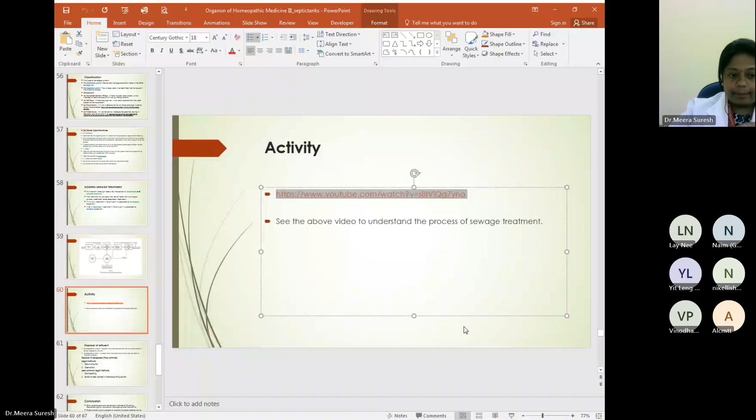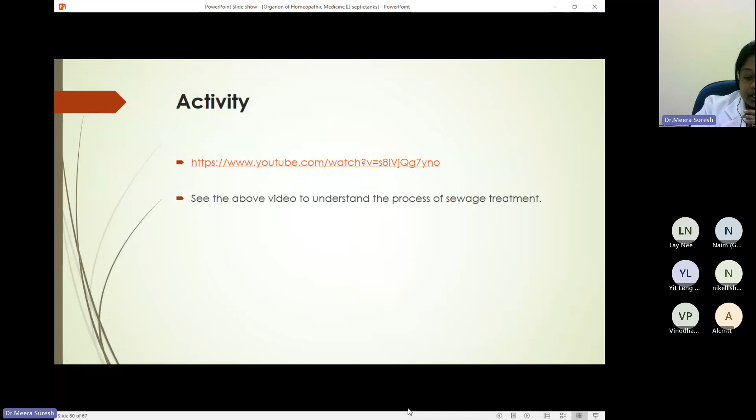So that is the basic principle happening inside a public sewage system. So you saw that both the aerobic and anaerobic oxidation is taking place, the purification. So the final outcome is that sludge is now safe to be disposed into any water, especially seawater. And then it will be gradually decomposed, or we can use it as a compost for manure purposes. So that is the process of sewage treatment to make it a stable one, which is not dangerous even on exposure.

So the disposal of the final effluent: it can be disposed into rivers and streams, and that is called disposal by dilution, or it can even be disposed on land, wherever suitable land is available for irrigation purposes. Now, disposal of deceased man and animals. I didn't go into detail because these methods you know.

We have the legal and less common legal methods for the disposal of the deceased. The legal method is ground burial, and the other one is cremation, where you burn the dead body. The less common legal method is composting. In some countries, some people voluntarily are ready to do that. I have read something like that.

Then burial at sea. This can be like in the Hindu religion, which they follow after cremation: a little bit of the ashes will be thrown into the sea, or it can be the whole body that is disposed. And it can even be ship burial, like during a voyage. If they are not going to anchor at a nearby seashore or port, and there is no facility to store the dead body, then they don't have any other option than to throw the body into the water. So these are the methods by which the dead bodies of man or animals are disposed.

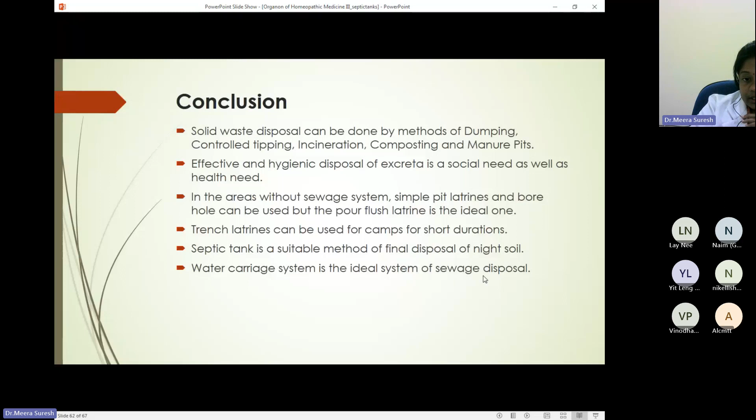Septic tank is a suitable method for final disposal of night soil in case of a small number of households. Water carriage system is the ideal system for sewage disposal, especially in city areas or where population density is very high. So this was taken from the PPT of Dr. Navpreet, assistant professor at Government Medical College, Chandigarh. I just felt it was very good.

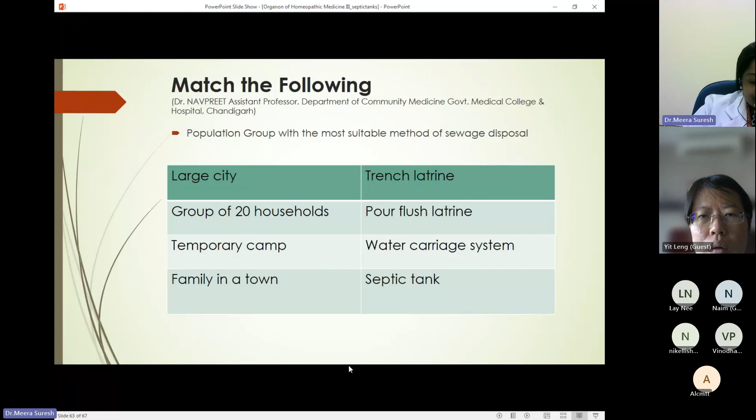So can we just do that? Large city, which will be the ideal one? Come on, open your cameras and give me the answer. Not camera, sorry, your voice system. Are you all hearing me? For a large city, which will be the ideal latrine that we can use?

Am I audible? Yes, Miss, you sound clear now.

Yeah, so which will be the ideal method in case of a large city? Okay, then we go to the second question. Group of 20 households. None of you were attending the class. Temporary camp, family in a town. Okay, fine. I guess you were not attending the class. None of this you are able to answer, I don't know what to say. So expect the unexpected question from this PPT for the exam. Okay, that's all I can do.

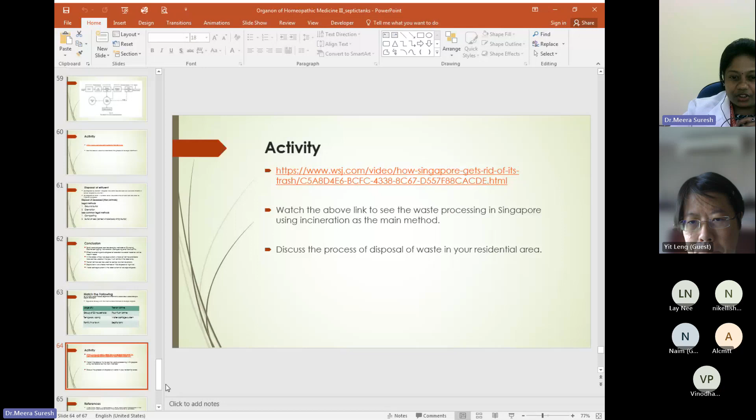Okay, this was about the waste processing in Singapore. You can watch it later, the incineration process that they do. References. Thank you. That's all for today.

So we'll see in the afternoon. And because you have not answered, I'm going to put a difficult question. I may even put the working of a septic tank or even the public sewage system. Study for the exam.